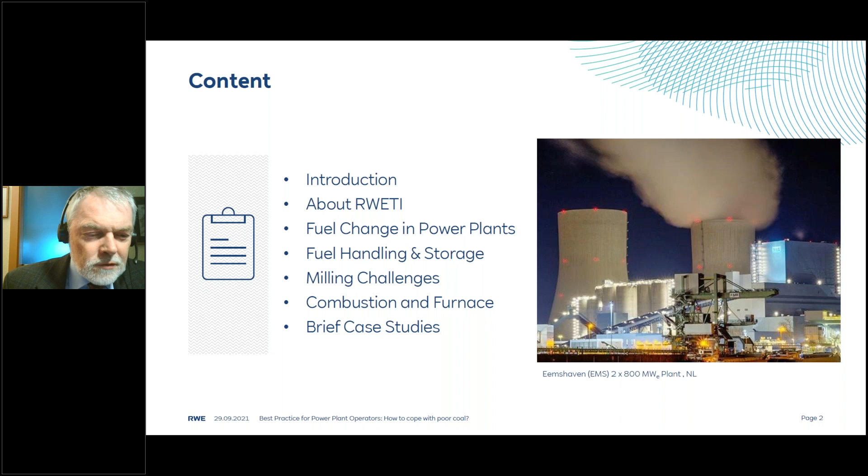The introduction will consist of the steps here: introduction and about RWETI, which I'll keep very brief because Indras Ghosh had done a very good introduction here. We'll look at the fuels, fuel change in power plants, a little bit at fuel handling and storage, and then I'll hand over to Axel, who will cover the power plant specific aspects, especially milling, challenges, combustion and furnace, and we'll conclude with a few case studies.

Okay, next slide please. I'll keep that very brief. The generation asset of RWE is actually very broad. It encompasses about any fuel imaginable, plus renewables.

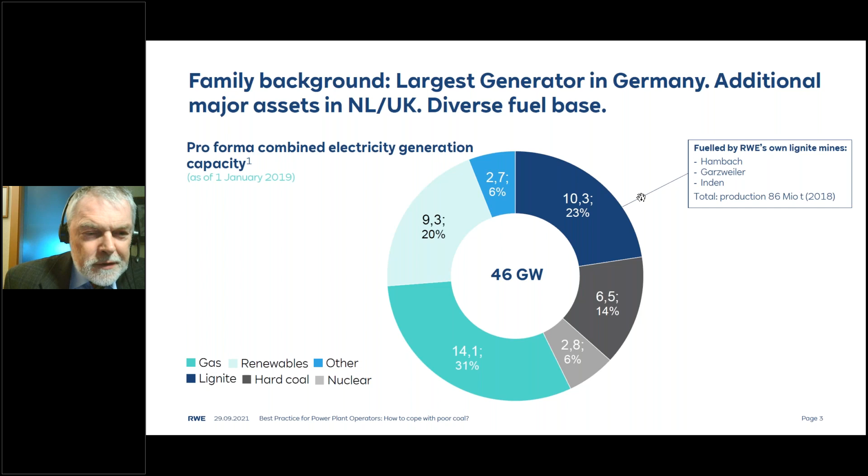RWE Technology International is the consultancy arm of RWE Group. We have bundled in there all the engineers, mining engineers and power plant engineers that we have in the group.

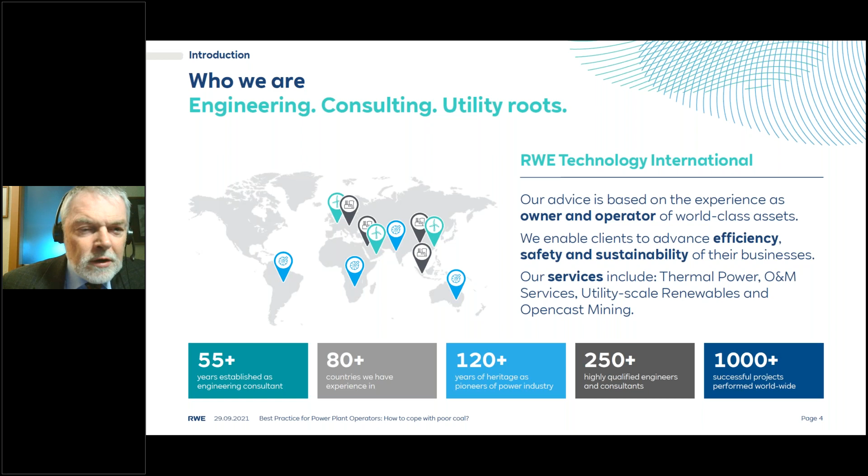I don't want to bore you with statistics about where we've been. The more important thing is that we continue to have very close contacts with our colleagues in operation, whom we can co-opt into projects if we need to, or just ask them. That sometimes is backup. The important thing is that our perspective is always that of an owner operator, and we're not just consulting and hopefully right about it, but we also have direct connection to the operational aspects and details, both in our power plants and in our mines. Okay, next slide.

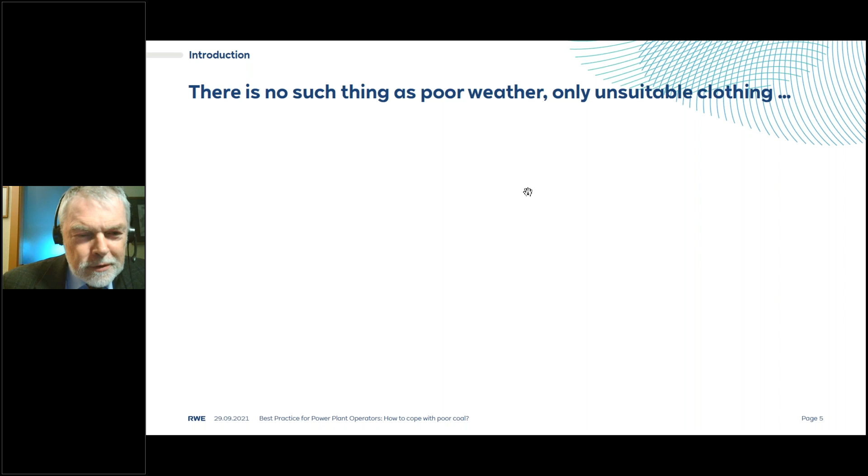Okay, now to the actual topic. You probably know the old adage: there's no such thing as poor weather, only unsuitable clothing. We can reformulate that for power plants, saying there's no such thing as poor coal, only unsuitable power plants, except that it's easier to put on a coat than to change a power plant. Okay, next slide.

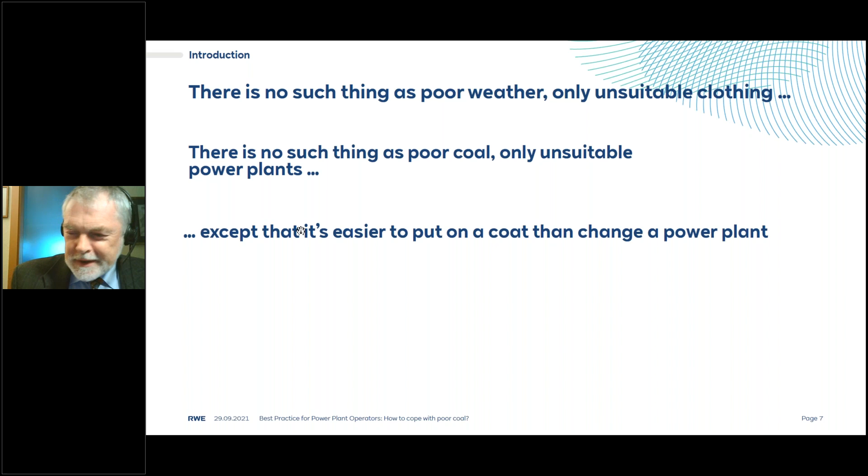Fuel change in power plants - the question is, why change fuel in a power plant? Next slide please.

When asking this question, we have to differentiate between the situation the power plant operator is in. There's a big difference between a mine mouth operator and somebody who gets the coal from somewhere else. I call that import in quotation marks because that could be actually from having it shipped from across the sea, or it could be domestic supply, shipped from a more distant mine by train or heaven knows how.

For a mine mouth operator, the reason for changing fuel is usually a captive relationship with the mine operator - it's usually mutually captive, they depend on each other. The reason they have to change is because the coal in the deposit changes. It doesn't change so much, but as mining progresses, they'll get to different parts of the deposit where the quality changes, and that can change quite significantly. Usually in the captive situation, you don't have much options - you somehow have to make it work.

That's it. For the import situation, it's different. Usually the power plant operator has at least potentially more than one supplier - it isn't coupled to one. For them, usually the question of why they need to change is because maybe from their preferred supplier, the better coal is getting exhausted. It could also be that because of market or contractual situations, the preferred coal is starting to get too expensive, due to more competition for the coal from other places. They also may be required to comply with new emission limits, which may require a fuel switch to cope with.

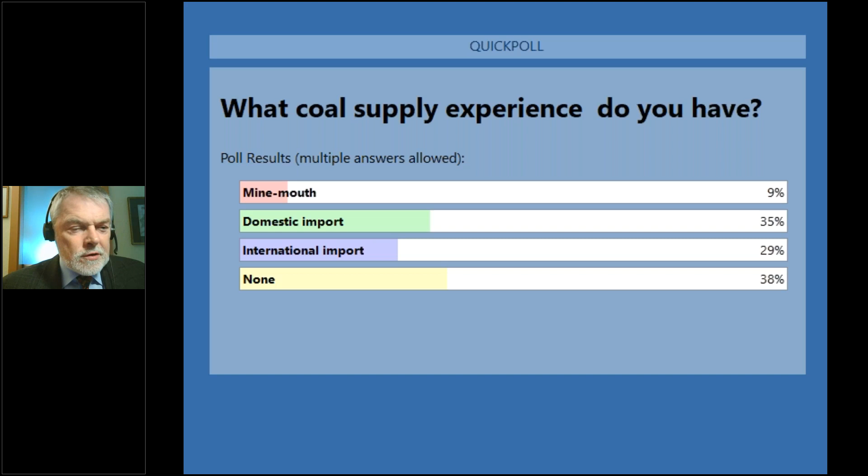Okay, so we see that most of you have actually domestic and international import. Some of you are in a mine mouth situation, and then of course some of you maybe not, you're not power plant operators. Okay, let's go on.

When it comes to those that import or get their coal from somewhere else, you have the difference between the fuel purchaser and the power plant operator himself. The fuel purchaser usually looks at price, would like to get low price coal. He's usually worried about having undisturbed transport to the plant. That may not be entirely trivial, depending on where the plant is located and where the coal is coming from.

Ideally, he would love to have a power plant that basically can consume any coal, especially the low-priced one. He certainly wouldn't like to have any restrictions to keep track of related to the coal quality, and ideally he would like to market the byproducts, usually the ash.

For the power plant operator, he is in a more cost-thinking mode. He has to worry about how the coal handles and stores. Different coals have different properties there. Very important to him is how they mill and how they fire. In particular, he's also worried about ignition stability and flame stability, depending on the kind of power plant he has. Then he has to make sure that he complies with all the emission limits.

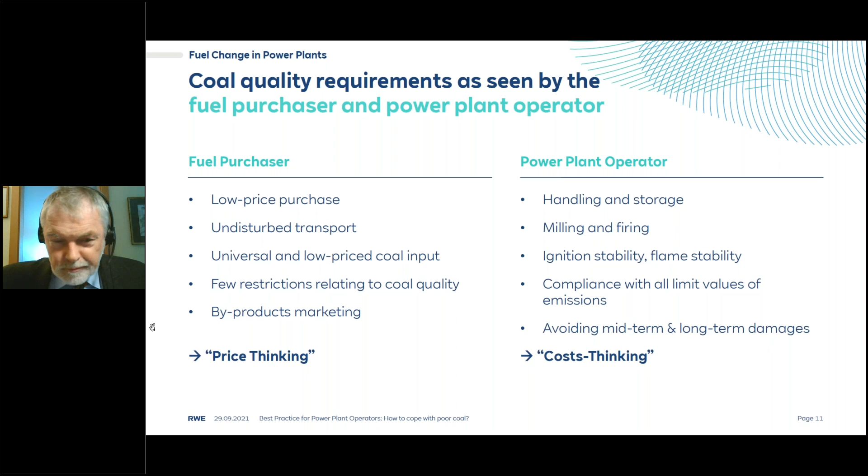Now let's go on to the fuel itself. In order to assess what the coal, or the new coal that the fuel purchaser is proposing to buy, is doing to your power plant, you really have to look at the complete analysis. You have to do the proximate analysis: water, ash, volatiles. For calorific value, you particularly also have to look at the lower calorific value or net calorific value, not just the gross calorific value.

As soon as you've got more than about 10% water in the coal, at the latest 20% water in coal for low rank coals, you definitely need to look at the net calorific value if you don't want to fool yourself.

You need to, of course, look at the elementary analysis. You need to know what the ash is composed of, because that has bearings on how it behaves in the boiler, and what is in there that can cause all sorts of problems later in the flue gas ducts.

And of course, it would be good to know the ash fusion trajectory. Your ash doesn't melt at a single temperature, but it sort of starts to soften initially, and then starts to get more sticky and liquid before eventually, when the temperature is very high, it gets really fluid. That also depends very much on the ash composition.

The last thing you want to have is getting into a regime where your coal becomes really sort of sticky goo that will just cover and stick to all your heat exchanger bundles in the power plant.

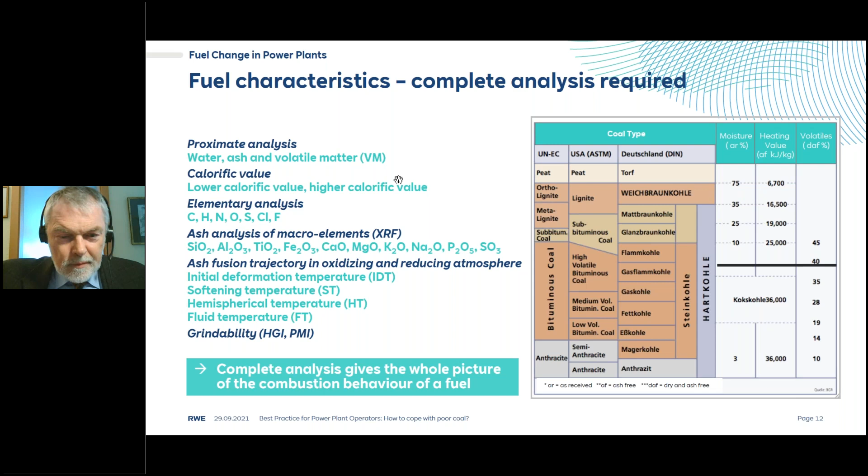This is showing the whole coal sort of on an ash-free basis, basically showing moisture content, volatiles, and fixed carbon, going all the way from the softest of lignites to the meta-anthracites.

You can see very nicely how moisture content decreases and with it the calorific value increases as you go from lignite B, where you can reach as much as 65 or 70% moisture, even more than you have here, to high volatile bituminous A, where you've reached about 10% moisture. After that, moisture becomes not a good differentiator anymore.

The other thing that happens is the volatile content slowly decreases. In lignite B, you have actually more than 50% volatiles on a dry ash-free basis, that is, more volatiles than fixed carbon. That ratio approximately reaches 1:1 when you get into the subbituminous field. Then as you progress from high volatile bituminous coal to medium volatile bituminous coal and onto anthracite, you see a strong decrease in the volatile contribution in your coal.

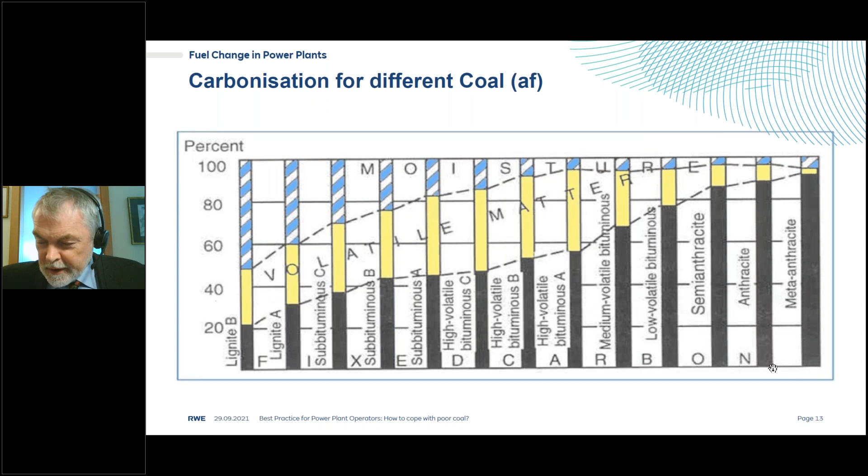When you're looking at imported coals, there is a wide range of coal compositions available from different countries. Here we've just shown moisture, ash, sulfur, volatiles, and lower calorific value — big differences in composition. Normally, the analysis of coal quality is done by independent laboratories, typically at the point where it gets loaded on ships or trains, but often it can also be done where it's landed.

The price is typically set following these characteristics: moisture, ash, sulfur, volatiles, and lower calorific value, and prices in the supply contract adjust for coal quality, not just calorific value but also for example sulfur content and ash content.

From Indonesia you get an extremely wide variety of coals, ranging in moisture from about 6, 7, 8, 9% to over 20%, whereas from Russia, Poland, United States, South Africa, or Colombia you get a much tighter range of coals.

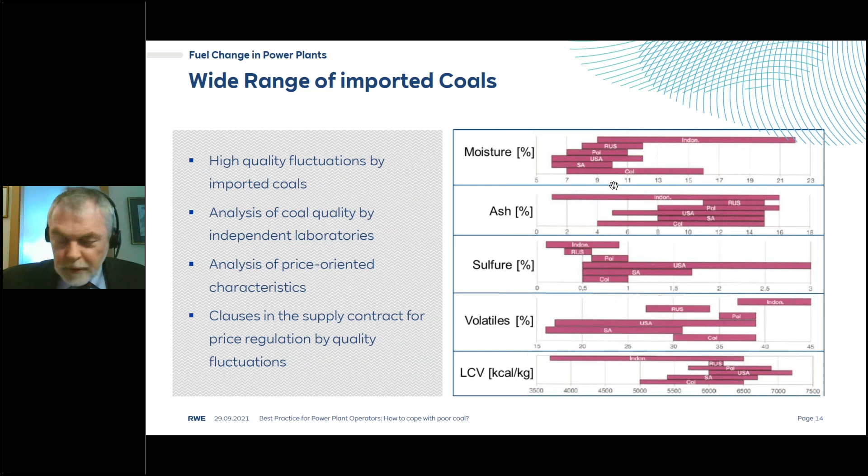For the lignites, which are the coals with moisture contents more than about 30%, typically in a captive mine or captive power plant relationship, you've also got worldwide an enormous variety of coal compositions, even more extreme than with the hard coals.

You have coals that have as much as 65% moisture and low ash, for example in Australia. On the other hand, you have brown coals in Turkey that go up as high as 50% ash and have only about 20 to 15% moisture.

On this diagram I've shown the coals as moisture versus ash, with the calorific value shown as isolines marked with their net calorific value, lower calorific value, in kilojoules per kilogram.

In India, coals tend to be in the range of low ash, between 40 and 50% moisture. Chinese lignites tend to be around just under 40% moisture and around 10% ash, so that's in the gap we have there. The most commonly traded hard coals would end up in the lower left-hand corner of this diagram.

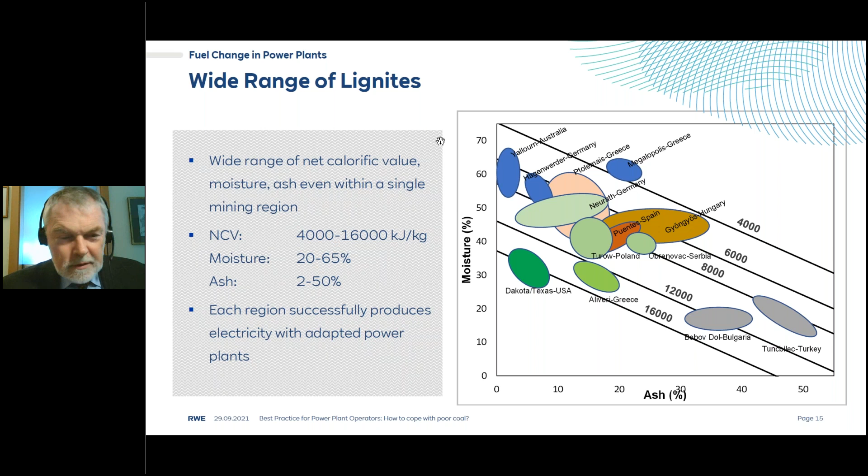I just want to briefly talk about coal upgrading, either as part of operations or as a standalone operation. That's basically something your coal mine could do.

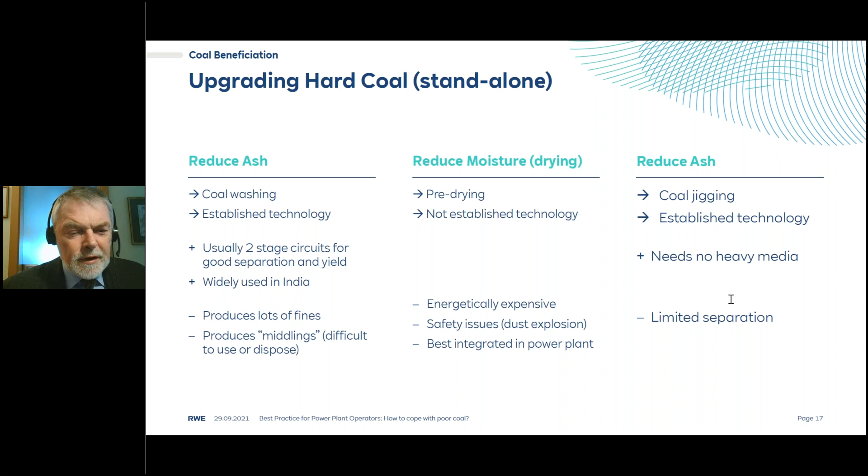Moisture reduction, pre-drying, is really not a commercially established technology. It's difficult to do. Its problem is it's energetically expensive in the sense that you need to evaporate the water you want to get out. You also, when you're drying coal, right away have safety issues, dust explosions in there. And quite honestly, if you do pre-drying, there are some ways of doing that, but it's best actually integrated in the power plant.

Lignite, upgrading lignites - basically the short answer would be forget it. When it comes to reducing ash, coal washing is basically not possible. The reason is the lignite will just disintegrate into a slush when you actually run it through water. Often the mineral is also tightly bound in the coal structure itself, so it's very difficult to separate the two or liberate the gangue, unless you have, let's say, zebra coals that exist, where you have thin layers of coal interbedded with thin layers of gangue. The material tends to be sticky, so it's very difficult to achieve separation. Really, when it comes to reducing ash, the only option you have is blending it with better lignite.

Moisture reduction, pre-drying - again, there is no established commercial technology. We do have one for pre-drying it at RWE, but it has its own aspects to it. The problem here is that with lignites, with the enormous amount of water in them and the amount of water that you need to get out and evaporate, it becomes very difficult. First of all, you have to expend a lot of energy to dry it. And second, it's very difficult to get the heat in that you need for evaporating the water to dry it, and it's very difficult to get the steam out.

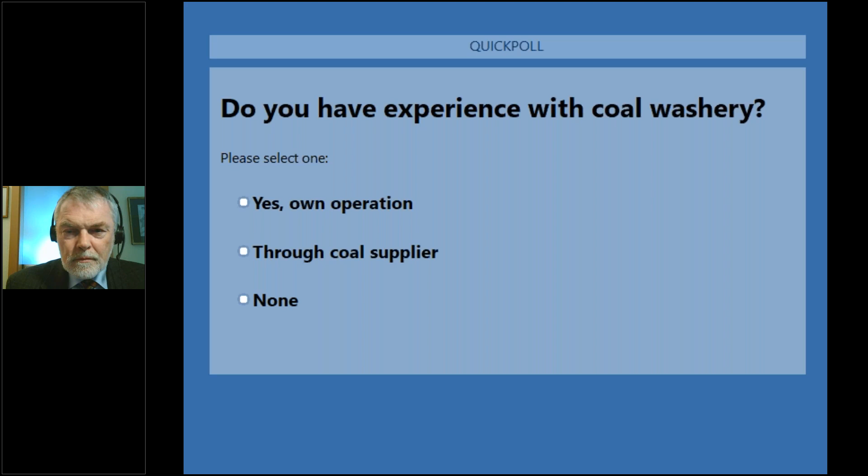So some of you actually operate your own coal washeries or through your suppliers.

Let's go on to fuel handling and storage. The important thing is that coals which tend to get hot during shipment should be avoided for transport. Many coals will actually self-heat and continue to heat up in the stockpile or the silo. The same applies in storage as well. Coal silos are actually a problem when there's air getting through there. While they do have the advantage of being able to blend different coals to some extent, and they protect the coal against sun and rain, coal yards are better for blending coals, but dust emission is a big problem. In all cases, for handling, you need a fuel storage solution, a fuel management system, in order to keep track of what you're doing, what you're mixing and blending.

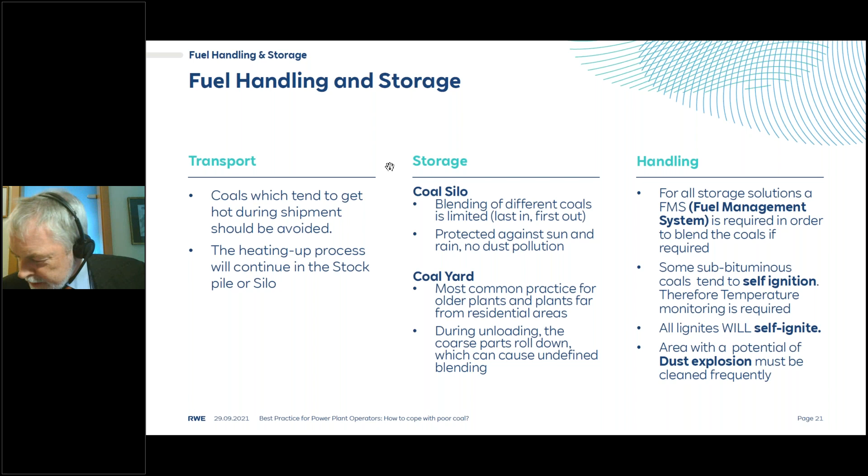Given the time, I'll skip over some of the handling aspects and switch directly to my colleague, Axel Meschgbiz, who will be talking about the impact of the fuel on the power plant. That will be slide 26. If you kindly skip forward, I'll close here and hand over to my colleague.

Thank you, Nikolaus, for your presentation. I will continue based on the information that Nikolaus gave you. I hope everyone can understand me. So we go to the next slide. Actually, I have to say there is a small delay to transmit the transparency on my PC, so sometimes there's a delay.

It is essential for the power plant to know which kind of fuel is coming in, and every power plant will be designed based on fuel information—the fuel makes the whole history of the power plant. Here are some major effects on the power plant caused by coal quality. For example, calorific values have a large impact on logistics, block performance, heat absorption, flue gas exit temperature, and so on.

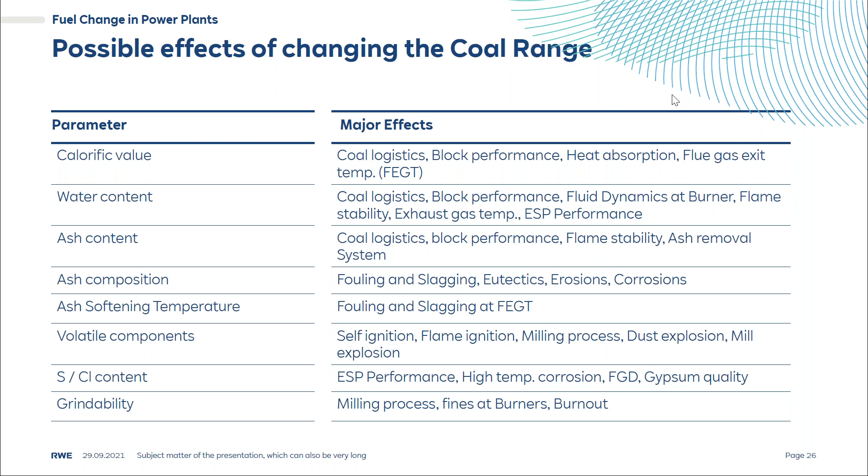Next slide: I have made for you a matrix that you can look at for future reference, if you are planning a fuel switch or using another coal, showing which component will have which effect on your power plant, so that you can discuss internally or with the manufacturer or supplier to modify that part of the plant.

As you see, the most impact is on the combustion and firing. There are many aspects because the flue gas volume will change, and some impurities in the coal cause problems such as fouling and slagging, and also the heat release in the combustion will transfer to areas that are not as designed, so you have to make some adjustment at your power plant, otherwise you run into problems.

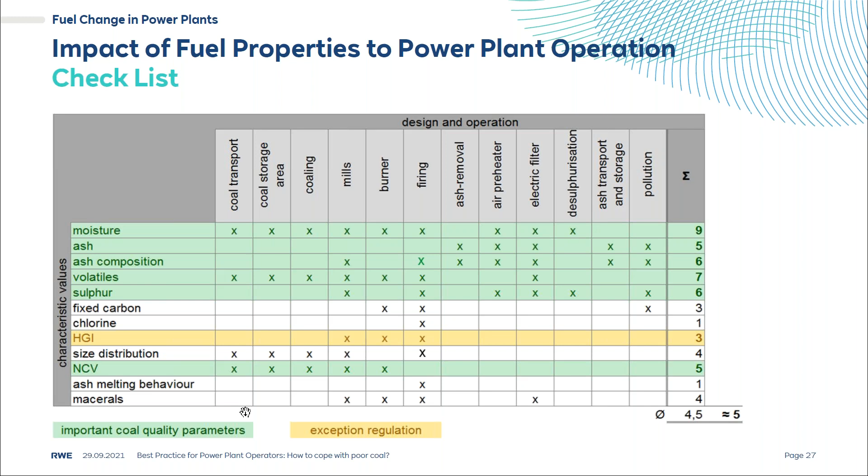As Nikolaus said, there is no bad coal—it must only be the right solution for this coal or fuel. Let me show you some different types of combustion.

For very difficult fuels, stoker firing is recommended, and for medium difficult fuels, CFB combustion is recommended. The PF boiler has the highest efficiency but is quite sensitive to fuel change and needs careful operation. There are also other combustion types like cyclone, retort furnace, and rotary furnace that are very special for some special devices.

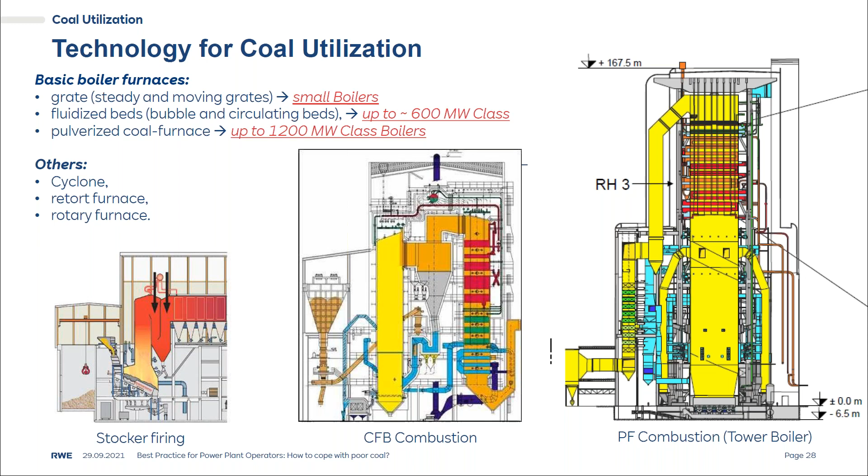In the next slide, I will ask you to fill the poll. You can make multiple choices. What is your plant experience background? That is important to continue this presentation.

So I expect that most of you have hard coal.

My expectation was quite right, but there is a higher percentage with lignite, which is also in India quite often. Okay, so thank you. To the next slide, please.

So I expected this answer, so I make a comparison between lignite and hard coal. The lignite has, due to the high moisture—let's say the green bulk shown—a much higher volume. Therefore, plants with lignite are much bigger than bituminous coal plants.

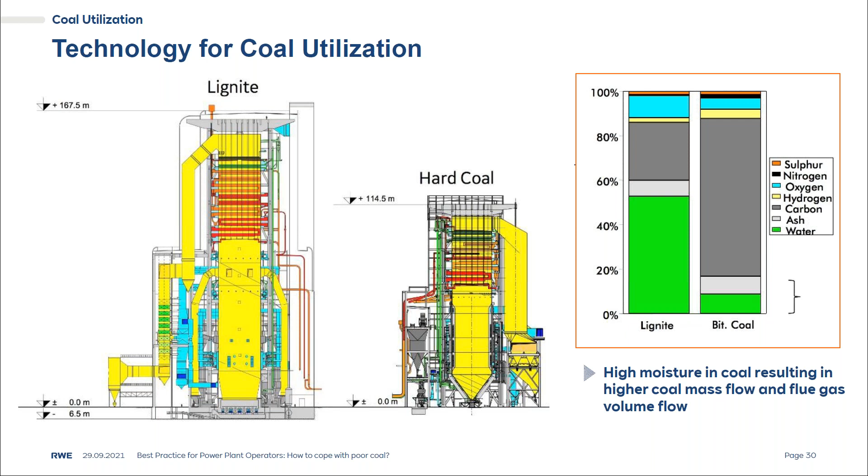The impact of milling is an example that I want to show you. Most of the power plants that are changing from bituminous to subbituminous coal, buying from the spot market, are challenging with the milling.

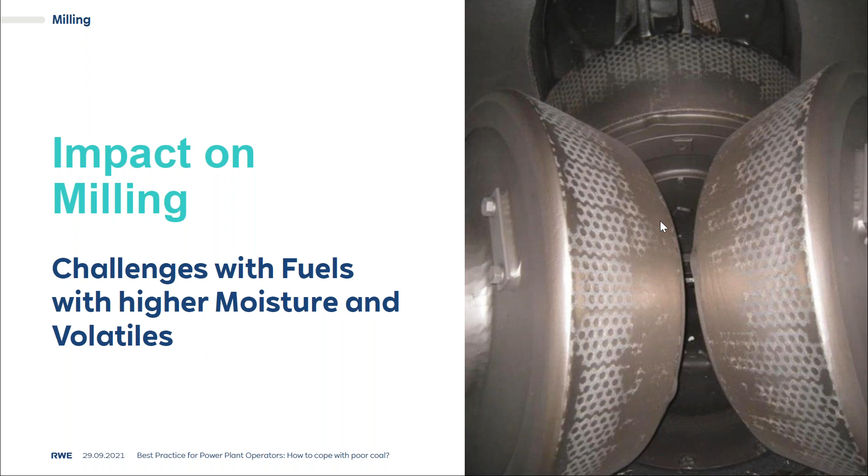And if you don't make any changes to the mill, you come into conflict with the milling operation. Here's the slide showing the operation limit of a typical mill for bituminous coal, with heating value and, at the bottom, the water content of the fuel shown.

For example, if you take the heating value 27,000 with a moisture content of 0.15, then you are in the white range—it's okay.

If you go to 24,000, that is a heating value for a typical subbituminous coal, you're coming into the red area, and you have to change the operation of your mill. Otherwise, you don't get the results that you want for the combustion.

So milling is affected if the water content increases, usually the heating value will go down. And so one solution is to reduce the separator exit temperature to bring the mill into this operation range, but that is also limited.

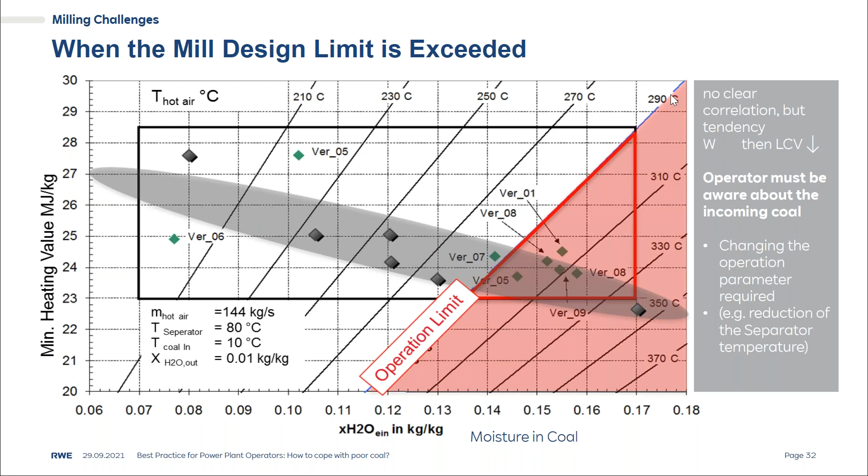In the next slide, I show some experience that we have in our power plant in Germany. That is a 600 megawatt unit, where due to the high volatiles and wrong operation, a mill exploded. You see some pictures, some impression of what happened. For example, the elevator was damaged, and here you see a safety gate valve that is totally damaged, and the thickness shows the high energy that was released, which is a serious accident that might injure people who are around there.

So be very careful with changing the fuel. There must be some investigation done before that.

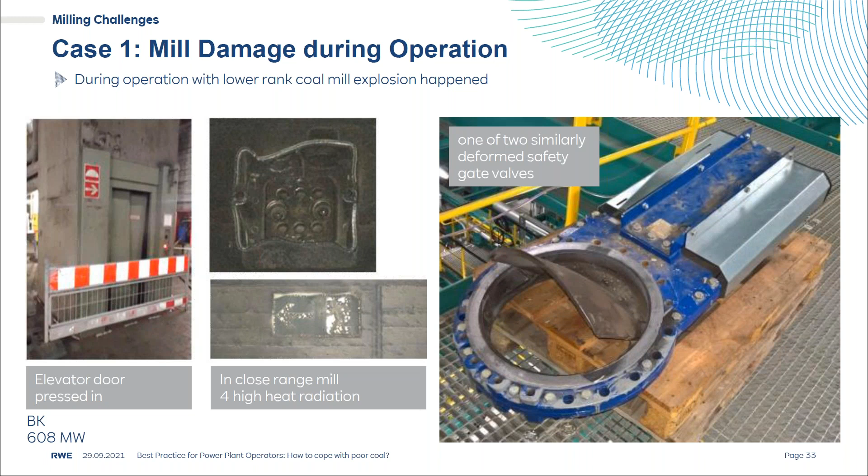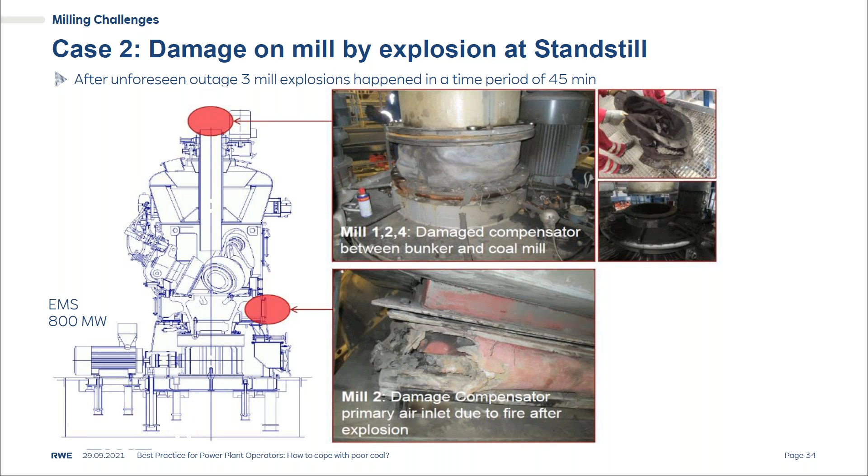In the next slide, we take some measures to be safe with operation on poor coal, including having an explosion suppression system in the mill. We installed them in the mills. When an explosion happens, this suppression system will activate and suppress the explosion.

At the beginning we had some problems with them. They activated sometimes when it was not needed, but meanwhile we have optimized it and now we have it working well in operation. We can handle it.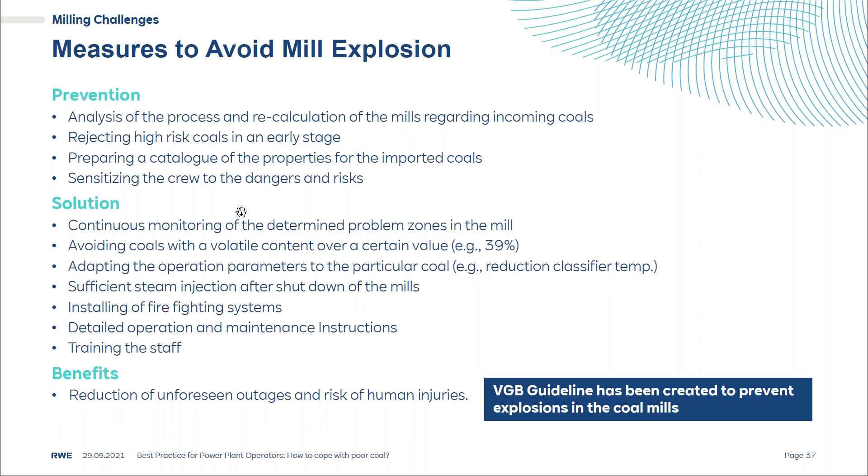In the next slide, I will give some examples on the effect on combustion in the fuel change, and we continue directly to poll 4 with a question about your experience with problems caused by fuel change, if you have any.

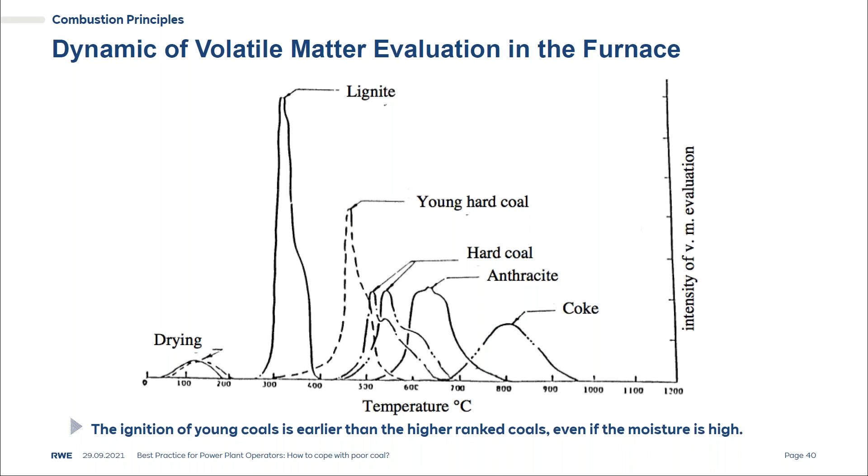So next slide, please. One example is changing operation modes in the furnace.

As Nikolaus said, there's a softening temperature, what is very important. This softening temperature shouldn't be lower than the furnace exit temperature, so that the particles are getting solid before entering the heating surfaces.

So we have an example here. We have a lignite, for example, with 50% moisture. We dried it up to 12%, but we keep the impurities the same. So you see that the temperature in the furnace increases and the furnace exit temperature is higher than it should be before entering the heating surfaces. That happens not this extreme, but it happens if you go from bituminous coal to subbituminous coal with higher moisture.

Usually they have higher moisture, so please take into account that this is an important issue so that you can operate your boiler safely. You see some pictures, a very nice picture, but you can see what happens if the soft ash is getting to the heating surfaces, and it will accumulate there. Next slide, please. So that is the minerals.

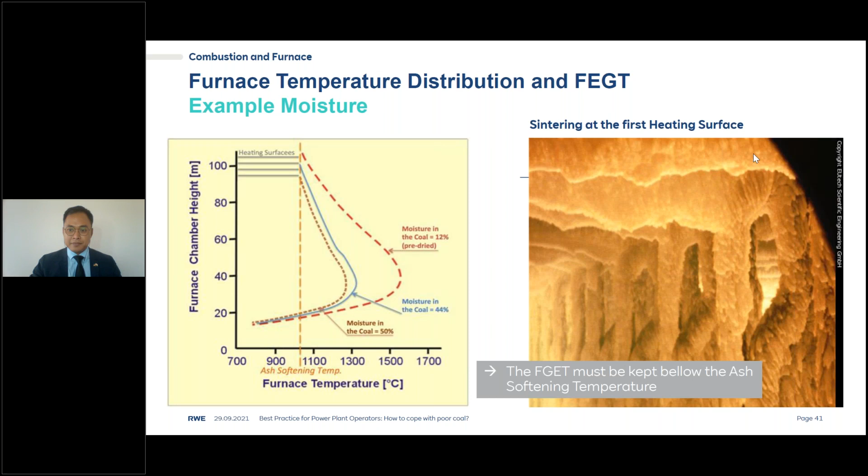Sorry to interrupt. We can actually launch the fourth poll again right now, we just fixed it from the back end. Can we do that right now? You want to do it after the presentation? We can do it after the presentation, maybe. Now sure, no problem, I have a few slides so that we can do it then later. Thank you, sure, thank you.

So please, next slide, Annie. So the minerals are the most important part causing fouling and slagging. And here there's a very nice picture of what we have seen in our power plant, growing at the bottom and also at the top. So where the temperature is too high and the minerals get soft, they will accumulate and the boiler is getting problematic to operate.

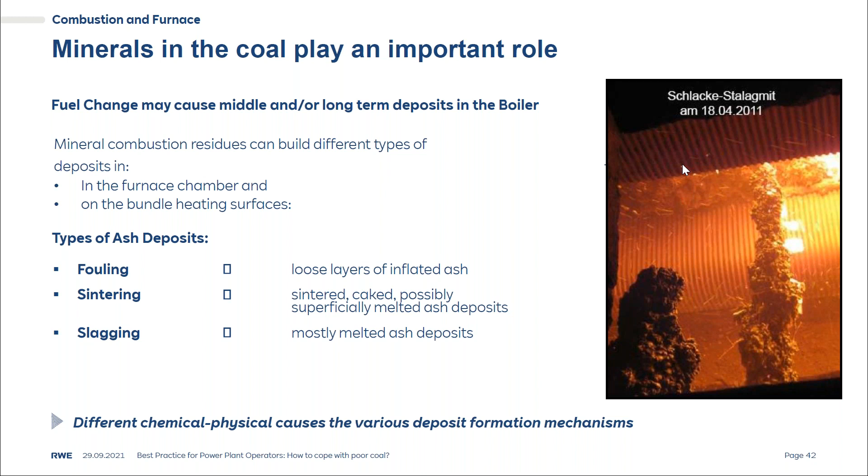In the next slide, we can see what kind of fouling and slagging appears in which parts of, let's say here in this case, a two-pass boiler, getting from loose fouling that you can clean with a soot blower, and there are some bonded and some harder parts in the side at case C, and in the very high temperature zone you get slags that get really hot and you have to stop operating the plant.

In the cases C and D, you cannot clean the plant anymore. You have to stop the plant and clear it and clean it. So that should definitely be avoided, and you can avoid it also if you look at your power plant before you change the fuel.

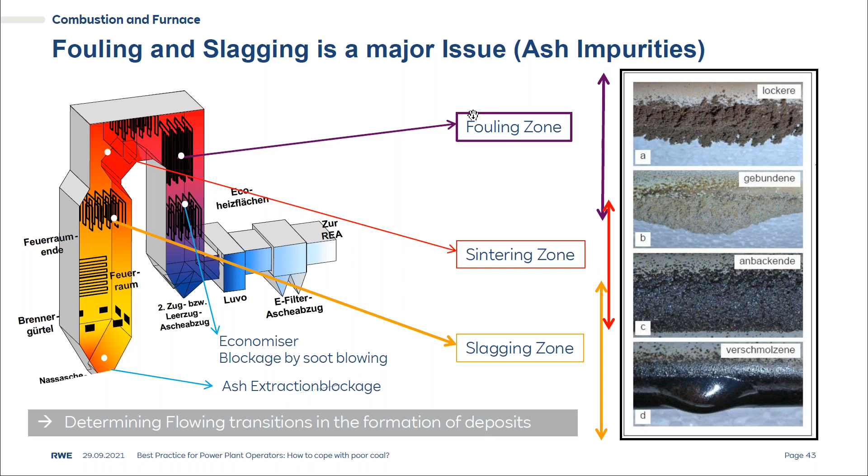In the next slide is the solution that we found for our boiler: making CFD calculations for the boiler. We had 30 boilers in our fleet, and for all of them we made a CFD calculation to optimize the operation, very successfully. Since then, we have reduced outages dramatically.

For example, on the left side, you see the surface of 1,100 Celsius, the gray surface, and you see it's entering the heating surfaces. So we changed the boiler, made some modifications and adaptations only by giving the data into the CFD, and we calculated the boiler again with the CFD, and on the right side you see the result: we now make the combustion more smooth and compact, and the heat, the 1,100 degree surface, is much more lowered below the heating surfaces.

And we did it only by modeling. We didn't do any other things. The model said the burner should be this size and need this modification, so we built it directly based on this model. We didn't make any other tests before. So the model is now very reliable, and we're using it very often.

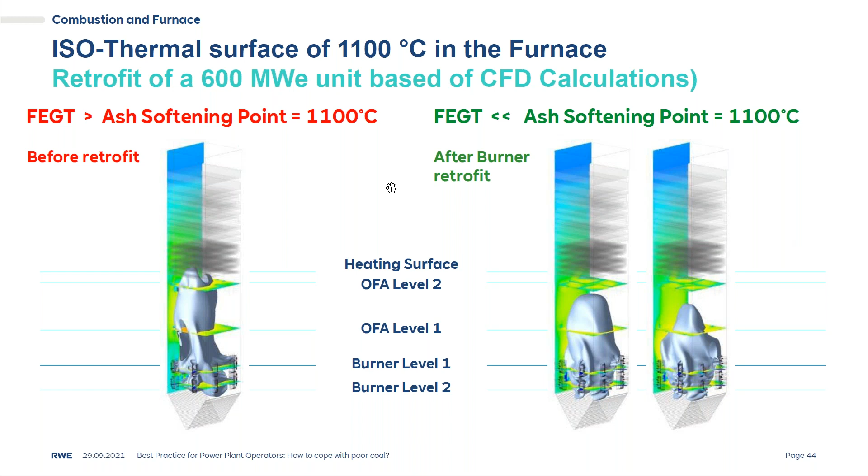And if we make some changes, fuel changes or any other changes we need, we have a lot of challenges with emissions, which we calculated with the CFD calculation. So in the next slide is a brief case, for example, what we did for a customer. Next slide, please.

For the customer in South China, they used a lot of different kinds of coal, coming from Indonesia, from everywhere actually. The problem was during a very weak typhoon, suddenly the ESP broke at the exit, and there was half a meter open. So we got in and investigated to see what was happening.